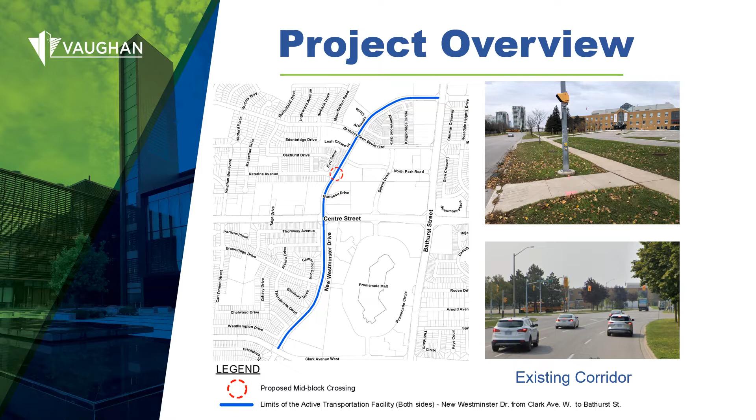The project includes replacing segments of sidewalk in localized areas and upgrading crossings to meet accessibility standards, constructing in-boulevard cycling facilities on both sides of New Westminster, upgrading 10 transit stops with new bus pads, a new signalized mid-block crossing at Katerina Avenue, upgrading existing mid-block crossings at St. Elizabeth High School and Westmount Collegiate Institute, upgrading 2 signalized intersections on New Westminster at Brownridge West Promenade and at Beverley Glen, replacing street lighting, and road resurfacing.

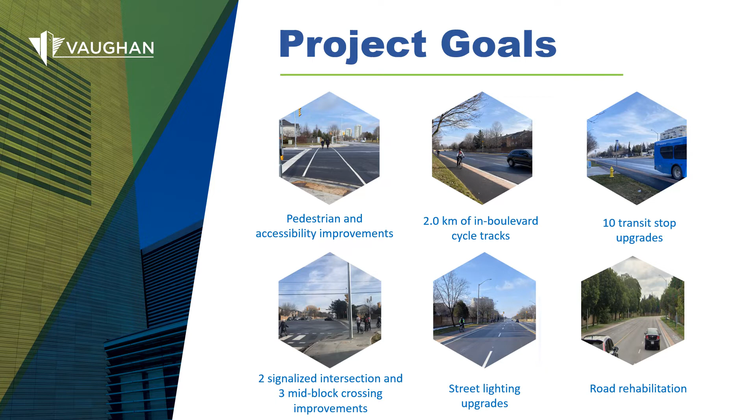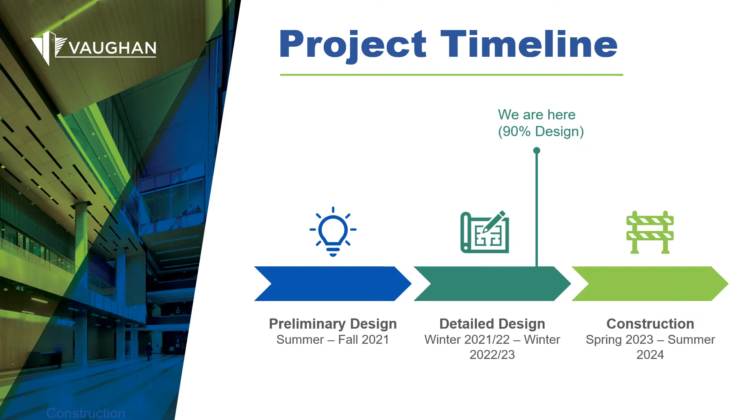The project design is well underway and scheduled to be completed in early 2023. Construction is scheduled to start in the spring of 2023 with construction planned to the end of summer 2024. The improvements on New Westminster support a number of city and regional policies and plans like the Official Plan, Transportation Master Plan, Pedestrian and Bicycle Master Plan, and Move Smart Mobility Management Strategy.

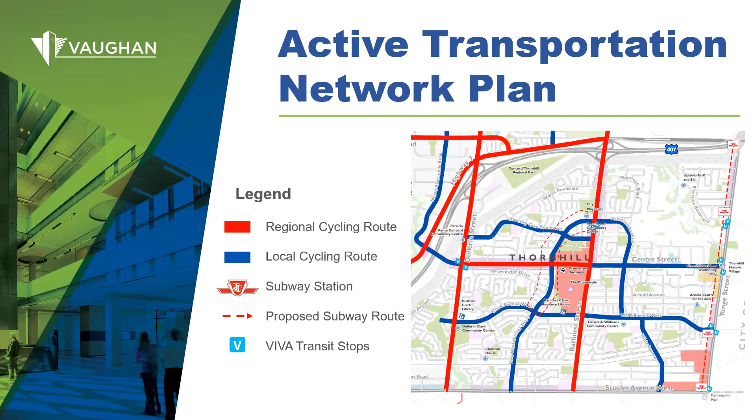Cycling is an important element of the city's transportation system. Design guidance has been taken from best practices like Ontario Traffic Manual Book 18 and York Region's Pedestrian Cycling Planning and Design Guidelines to meet an all ages and abilities design standard. New Westminster is identified in the City of Vaughan's Pedestrian and Bicycle Master Plan as a local cycling route, shown in blue. The cycling network in this area is becoming increasingly more connected with other projects on Centre Street, Atkinson, Hilda, and New Westminster to the south, also in various stages of planning and design.

This image shows the project area with the north direction being to the left of the screen. There are a number of key destinations such as schools, parks, retail, commercial, and significant residential density in the area. The improvements on New Westminster Drive will promote walking, cycling, and transit use, reduce potential conflicts between pedestrians, cyclists, and vehicles, and improve safety, renew aging infrastructure, and support daily community life and events.

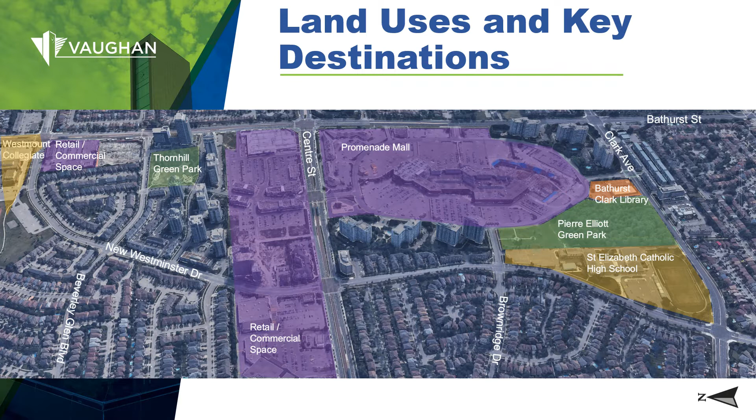York Region Transit operates Route 3 along New Westminster Drive and to and from Promenade Circle. There are 10 transit stops within the project limits. Existing motor vehicle lanes range in width on New Westminster Drive. There's a posted speed varying between 40 kilometers per hour in school zones up to 50 kilometers per hour. There are 2 mid-block pedestrian crossings where lane markings are not present. And on-street parking is currently permitted at certain times and locations on New Westminster Drive.

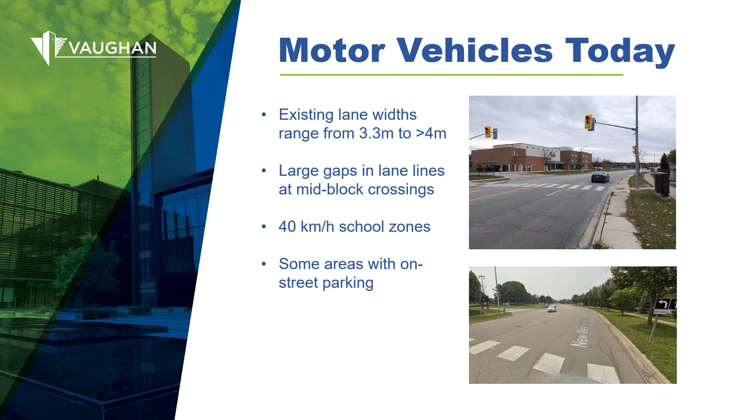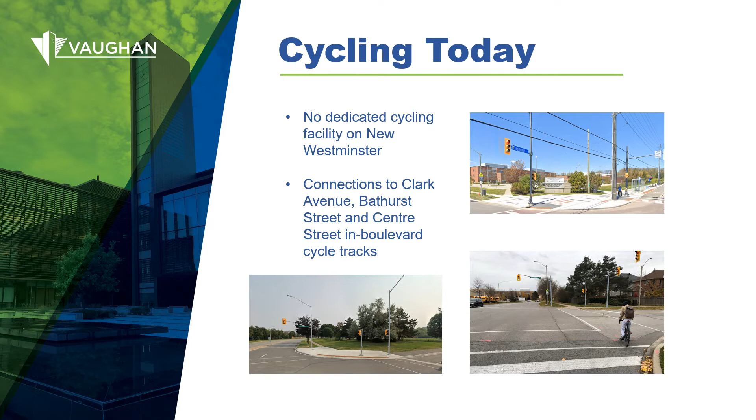Currently, there are no dedicated cycling facilities on New Westminster. Cyclists must ride on the street with fast-moving traffic, or some may choose to ride on the sidewalk, which negatively impacts the pedestrian experience. There are dedicated cycling facilities in the boulevard on Clark Avenue, Bathurst Street, and Centre Street. These are at the same level as the sidewalk and are called cycle tracks. There are continuous sidewalks on both sides of New Westminster. Crossings are not fully compliant with the current accessibility standards.

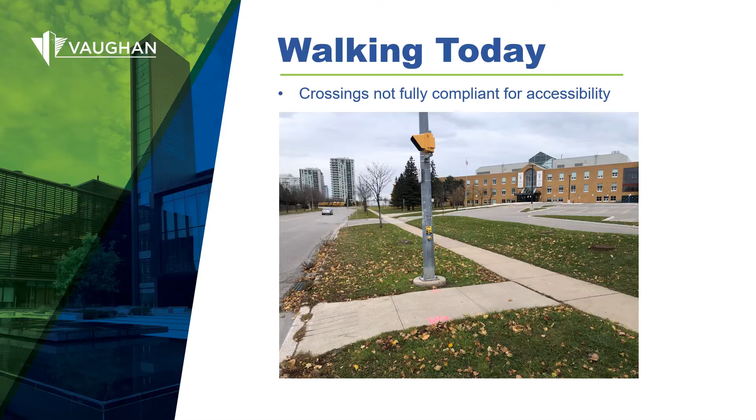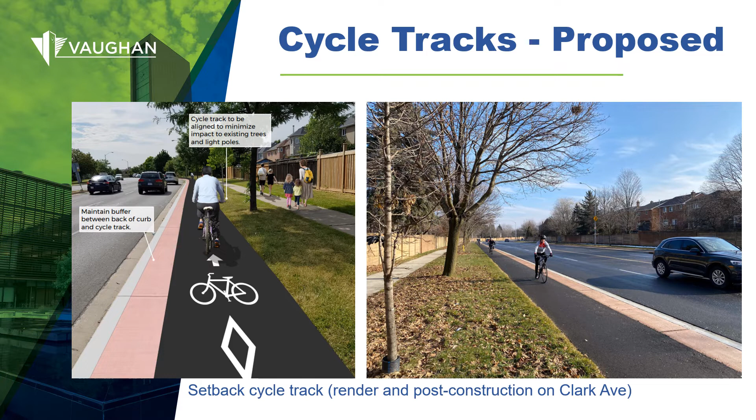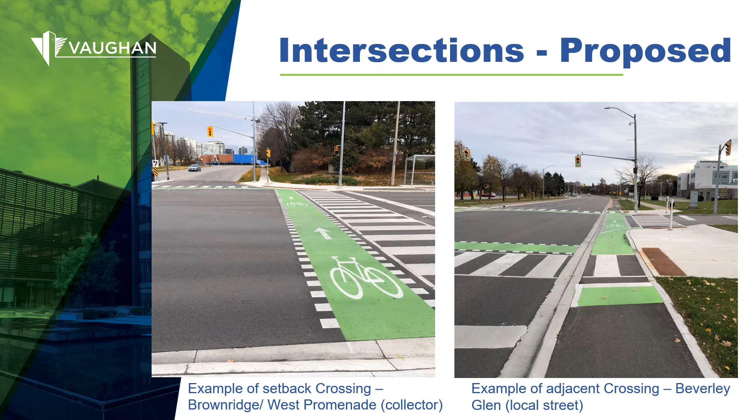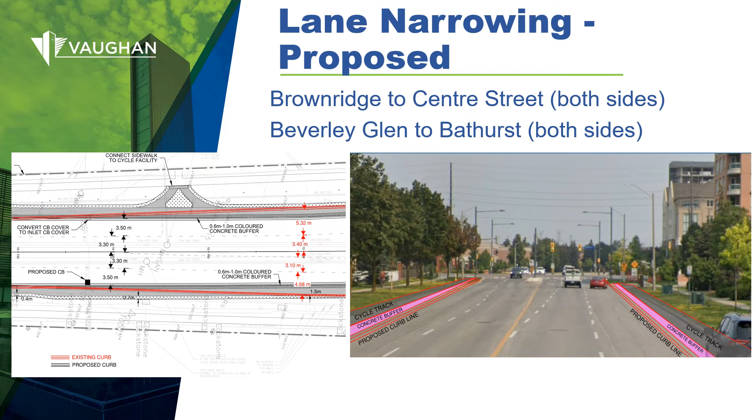There are a few areas where the curb will be slightly shifted inward and the travel lanes narrowed to allow for more boulevard space. The motor vehicle lanes are currently wider than necessary, and this will bring them to a width that better supports the posted travel speeds. It also helps accommodate the cycle tracks to be added in the boulevard while minimizing impacts to utilities and trees. An intersection pedestrian signal will be added at Katerina to accommodate a new controlled crossing of New Westminster for pedestrians and cyclists.

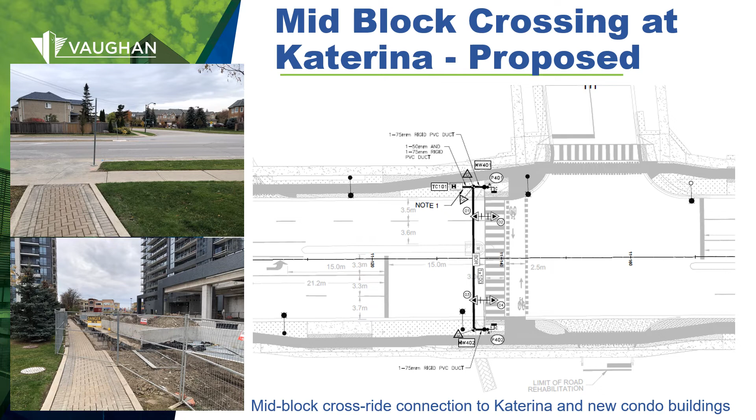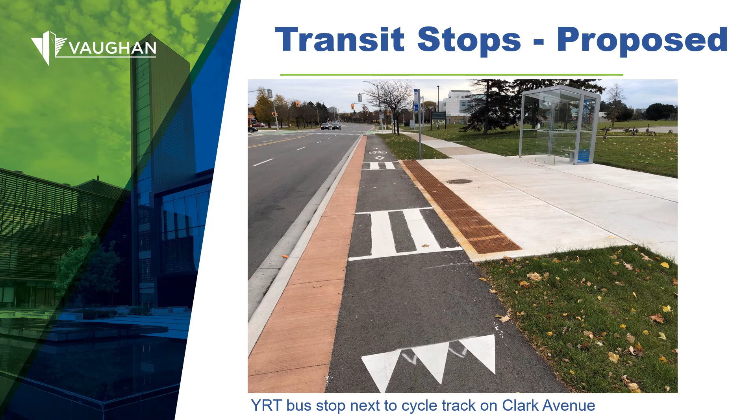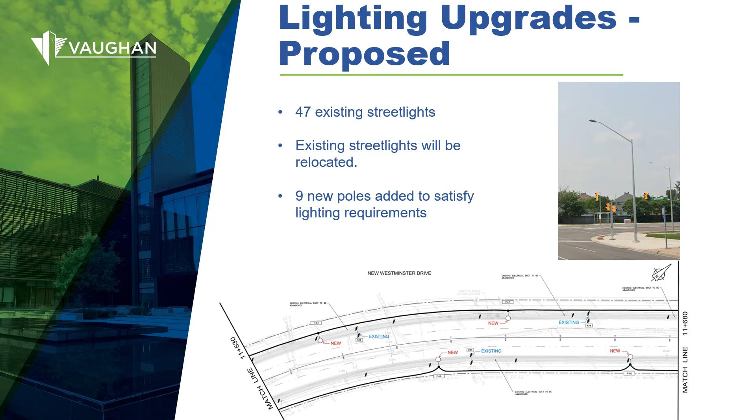The 10 bus stops within the project limits will be upgraded and some amenities added. What gets installed at a stop, such as a bench, shelter, and garbage receptacle, is determined by York Region Transit based on stop location and site constraints. Existing lighting is reaching the end of its useful life and will be upgraded, and in some cases, new poles added to satisfy lighting requirements. The roadway will be resurfaced for the full length, and in some areas where curbs are shifted, more extensive construction is required.

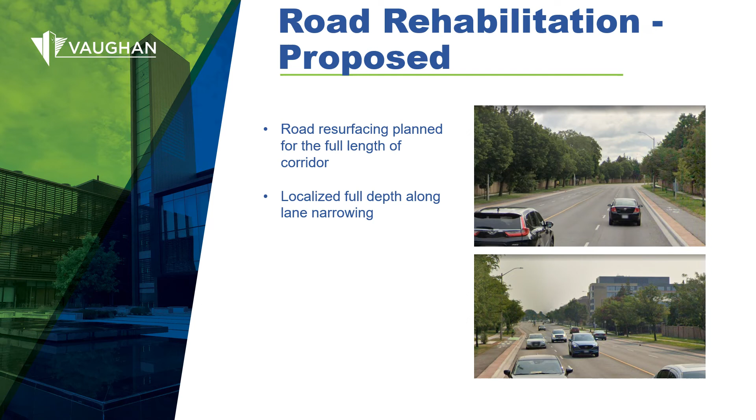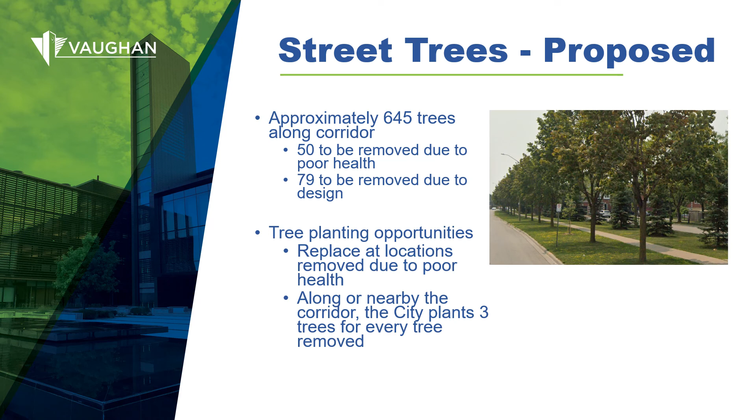The project is nearing the end of the design phase, and construction is anticipated to start next spring. Residents will be notified of project updates and lane closures through various city channels like newsletters, social media, and construction signage.